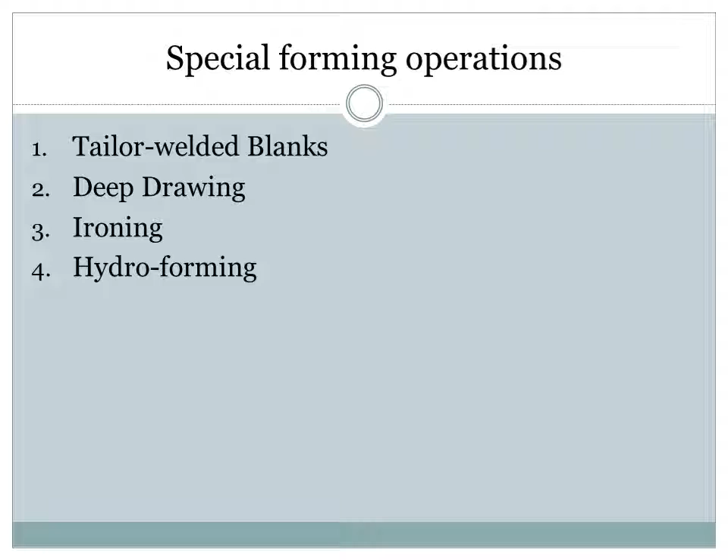Dear students, today we move on to the last session on sheet metal forming. Here we are taking into consideration four special forming operations. They are Tailor welded blanks, deep drawing, ironing, and hydroforming. Let us see each one in detail. First, we will take Tailor welded blanks.

See, in the sheet metal forming process, the blank is usually a one-piece sheet of constant thickness and cut from a large sheet. An important variation from this practice involves laser beam butt welding of two or more pieces of sheet metal with different shapes and thicknesses.

This is very important as far as an automobile body is concerned, where the frame of the automobile is made not with a single sheet, but it is like a box construction, and the forming is done after the welding of the outer and inner sheets together, and then the forming is done on the machine. So such kind of a forming process is called Tailor welded blank forming.

So this is called Tailor welded because it is like stitching together two pieces. So it is similar to that kind of an operation. Two or more pieces are joined together like a tailor is doing, and then the forming is done after the welding. So that is why these kind of blanks are called Tailor welded blanks. The welded assembly is subsequently formed into a final shape, and this technique has become increasingly important, particularly to the automotive industry.

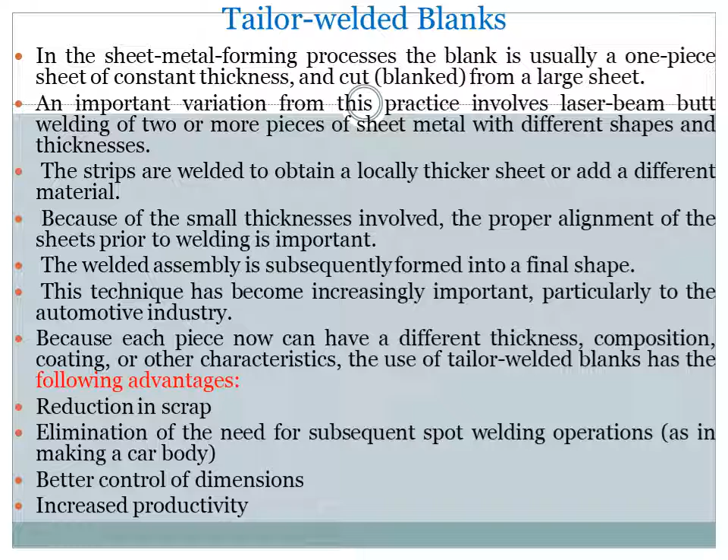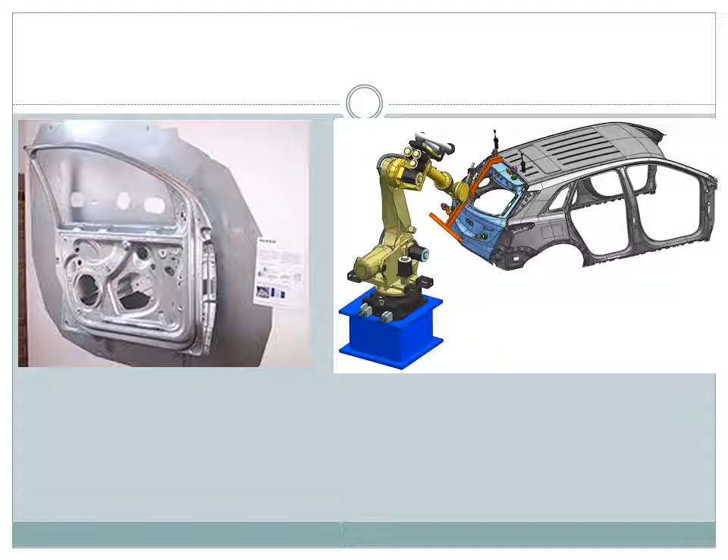So the major advantages are reduction in scrap, elimination of the need for subsequent spot welding operations, better control of dimensions, and increased productivity. Here a car body is shown. The first figure is a car door, which consists of an outer portion and an inner portion, and both are welded together first by laser beam welding, and then the shape is given to the welded blank. On the right side, the different framework of the automobile body is shown: the top side and the front side. The front frame assembly is shown by a robot, and each part's shaping is done after the welding is completed.

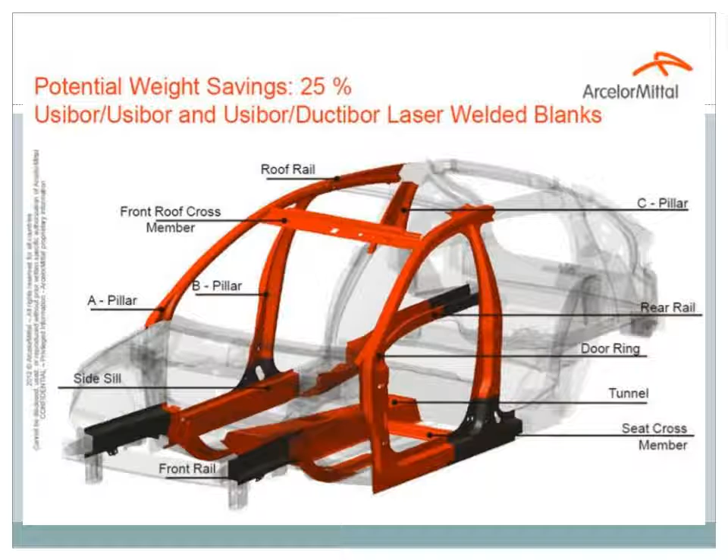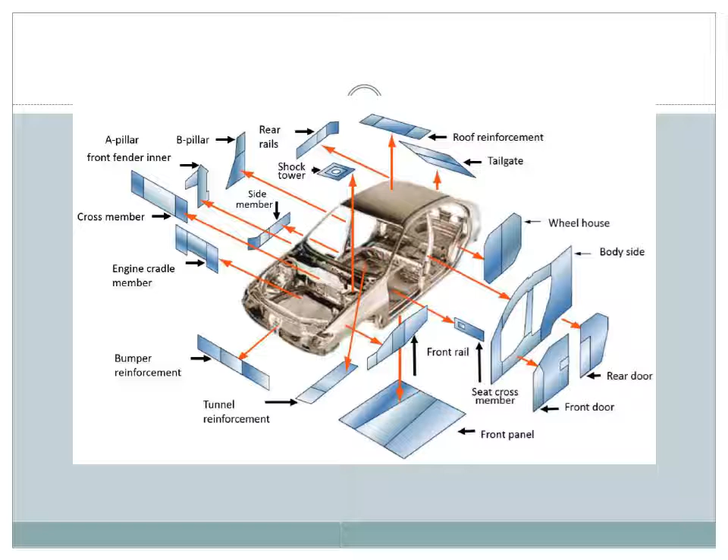And this is another example where in the automobile framework, each one is different pieces welded together, and the final shape is given after the weldment is over for each part, not the entire framework. Each framework is connected together so that the entire assembly is made, and each part is two or three pieces put together. This figure also indicates the different parts of the car body, each made out of two or more pieces welded together and finally shaped into the required form.

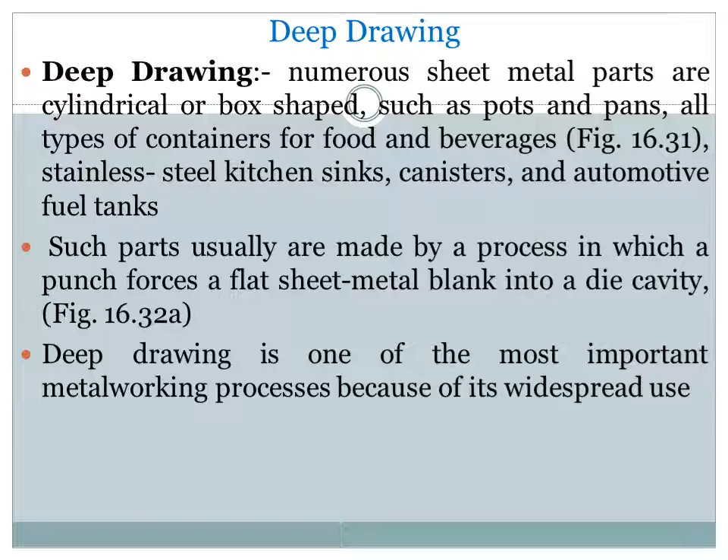Next operation is deep drawing. Numerous sheet metal parts are cylindrical or box shaped, such as pots and pans, all types of containers for food and beverages, stainless steel kitchen sinks, canisters, and automotive fuel tanks. These are all made by deep drawing, a process in which a punch forces a flat sheet metal blank into a die cavity. This is one of the most important sheet metalworking processes because of its widespread use. Let us see the various stages in the deep drawing process.

The first figure shows that the required blank is cut and kept on the die, held onto the die by a suitable blank holder, and the punch is over the die. In the second stage, the punch has come down and the blank is drawn into the die cavity. As it moves in, the blank is pulled inside. In figure C, the punch has moved further down, in D it is almost 90% drawn into the die cavity, and in figure E, the entire blank is drawn into the die cavity.

You can see in figure D the compression and thickening of the flange, because as the blank comes inside, the circumference of the blank at the outer side is contracted so that the required shape is made, so more material is drawn inside the cup or die cavity, and because of that the thickness of the blank is not uniform throughout the height of the cup.

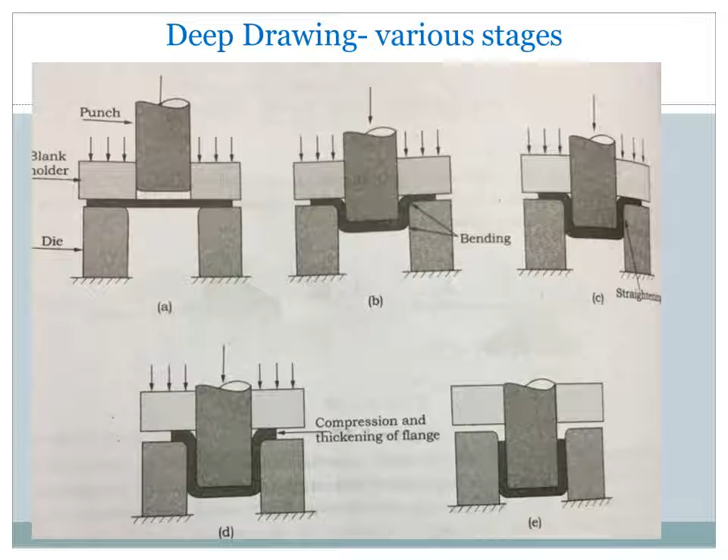This is because the blank diameter is varying, and as the bigger diameter is coming into the die cavity, more material is there, so this material is compressed into the outer wall, and this may cause more thickness, or the variation of thickness from bottom to the top on the rim is one problem with regard to the deep drawing process, and to some extent can be eliminated by providing suitable blank holding force

onto the blank, so that the force is so adjusted that as it moves inside the die cavity, there can be variation in the blank holder force. Wrinkling is another problem related to this deep drawing, because more material is coming into the die cavity. This may cause some wrinkling on the rim, which also can be adjusted by adjusting the blank holder force.

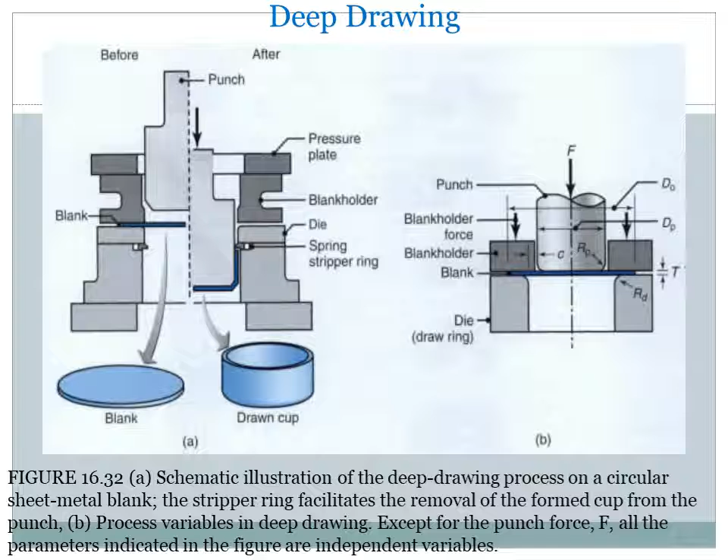In addition to that, the blank holder force and the lubrication applied onto the blank are some of the factors which contribute to the smooth drawing process. The major variables in this process are properties of the sheet metal, ratio of the blank diameter DO, then the punch diameter DP, clearance C between the punch and the die, punch radius RP, then die corner radius, blank holder force, friction and lubrication between all contacting interfaces.

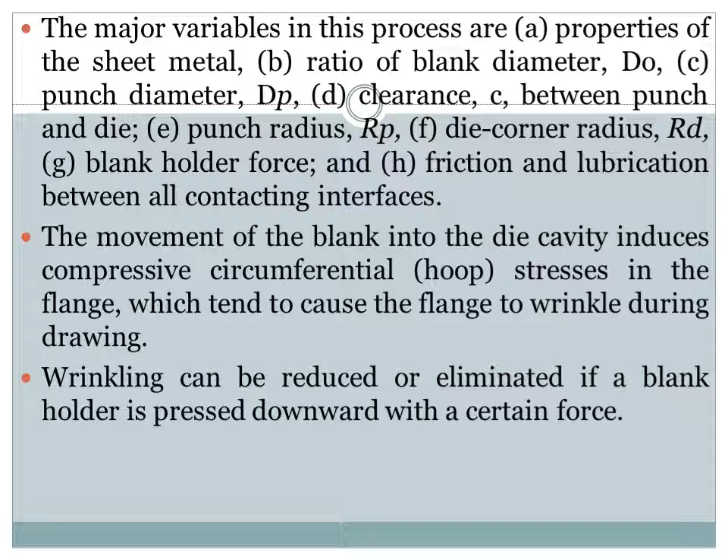The movement of the blank into the die cavity induces compressive circumferential stresses in the flange, which tend to cause the flange to wrinkle during drawing. So this is what I told. As the punch moves down, the larger diameter circumference is drawn into the die cavity, which causes wrinkling, and this can be reduced or eliminated if the blank holder is pressed downward with a certain optimum force. So this is an important parameter in the case of a deep drawing process.

Next is ironing. If the clearance between the punch and the die is sufficiently large, the drawn cup will have thicker walls at its rim than its base. So as I told you, as more material is pulled inside the die cavity, there is a variation in thickness on the rim of the cup. This can be made uniform by this special process called ironing.

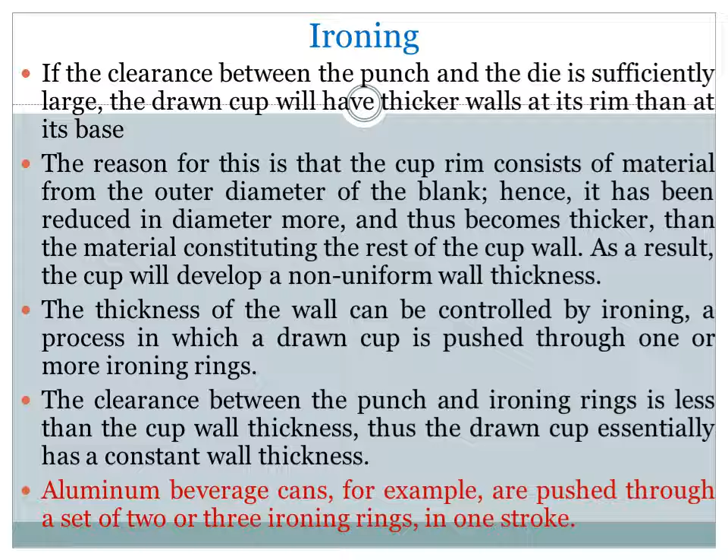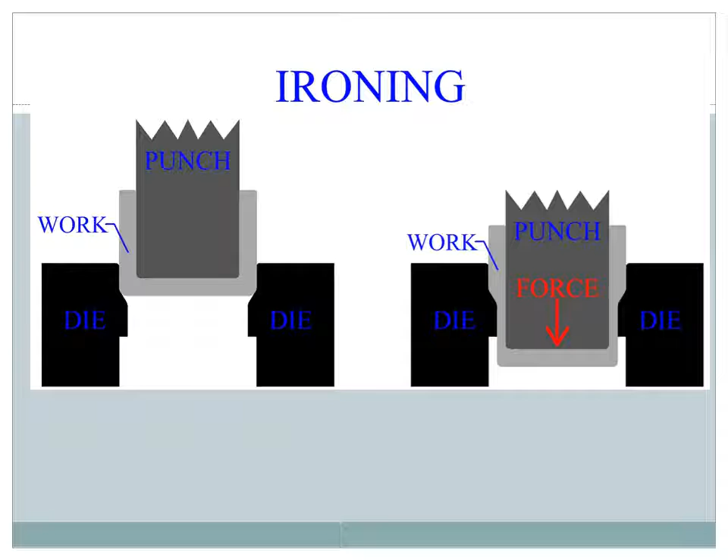Next is hydroforming. This is a hydroforming process shown in this figure. Here a high pressure fluid is acting on the blank, and there is a rubber seal provided on the periphery of the blank, and a pressure of about 100 megapascals is acting from the top. When the hydraulic pressure acts on the blank, as shown in the second figure, it pushes the blank onto the punch surface, and it takes a shape as shown in figure 2.

As the punch moves up against the hydraulic pressure, the blank will take the same shape as the punch, but there is a difference between normal deep drawing and hydroforming. Here the hydraulic force is always acting against the punch, so the blank is held to the punch with a high compressive load, and this will help in a situation where there could have been some fracture because of the drawing operation. That can be eliminated by applying a compressive load against the punch movement. The blank is always in contact with the punch because of the hydraulic pressure, which gives a better drawing operation.

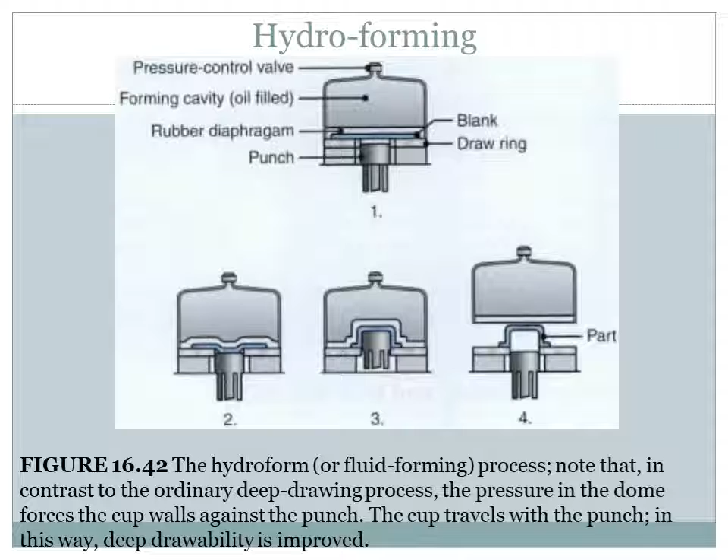Finally, the drawn cup can be taken out, as shown in the fourth figure. This procedure allows close control of the part during forming and prevents wrinkling or tearing. Deeper draws are obtained than in conventional deep drawing because the pressure around the rubber membrane forces the cup against the punch. As a result, the friction at the punch cup interface increases, which reduces the longitudinal tensile stresses in the cup and thus delays the fracture. That is the advantage of hydroforming. Hydroforming and normal deep drawing are almost similar, but these are the special advantages of hydroforming.

So with this, we complete the sheet metal forming operations, and we will move on to the sixth module with topics like weldability and different types of welding, which we will start in the next class.